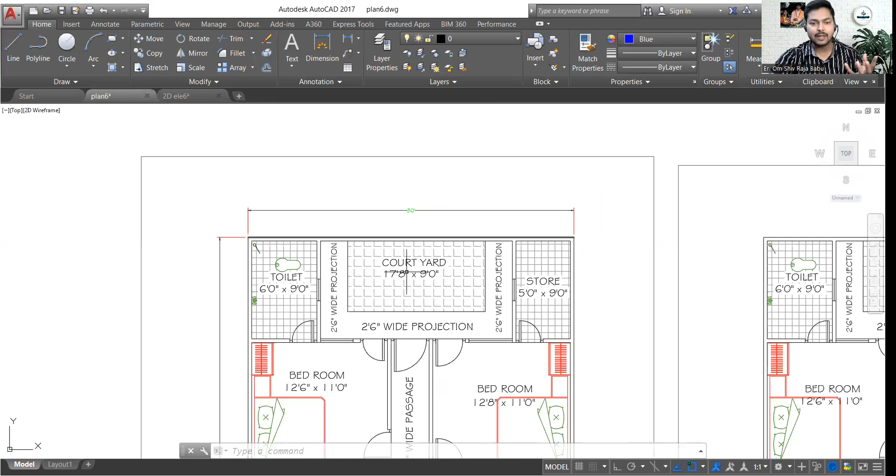Then you can also see we have this porch area for the ground floor, and on the top floor we have the balcony. So we can just provide a few ducts over here, and this is also going to be a duct over here. But obviously this is not mentioned over here, so I can just draw two lines so that it can be very easy for you to understand where the duct is provided.

So this is the first line, and then this will be our second line. Okay, so I'm just going to do it for you. So you can see this is the duct over here. We have one duct over here, another over here, and at the back we have a courtyard, which is also acting as an open space over here.

Okay, now the next thing is we need to consider that each and every element should be present in the house. Like, we should have a drawing room, living room, dining room, kitchen. Then we should have a common toilet. We should also have at least one master bedroom for such a big plot, and we should also count the number of rooms over here.

So on the ground floor, what do we have, two bedrooms, right? So on the ground floor, it is a 2 BHK arrangement. On the top floor we have a 3 BHK arrangement. I will also show you how to increase this. Okay, now according to the requirement, it is discussed so far.

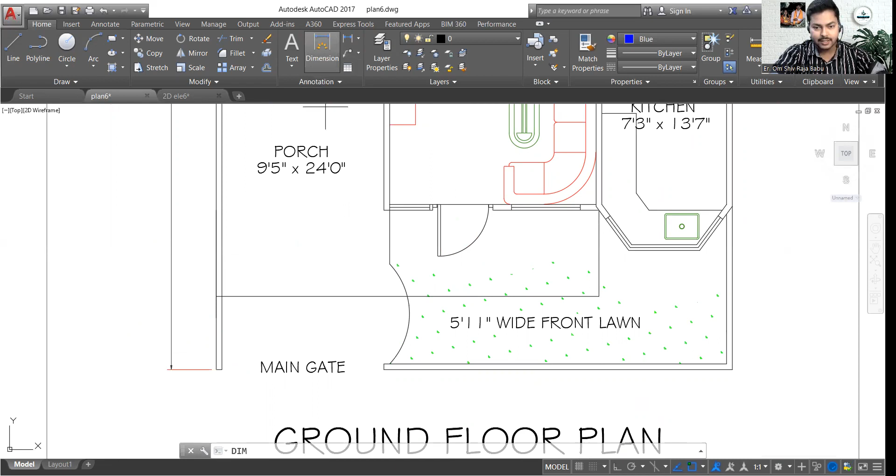So let's see, this is our main gate. Okay, this is a wide main gate right over here, and if I check the dimensions, let's see how much the dimension is provided. So it is almost 9 feet 5 inches, a wide gate, right? So you can also reduce it to 7 feet or 8 feet. That's up to you, how much is your requirement.

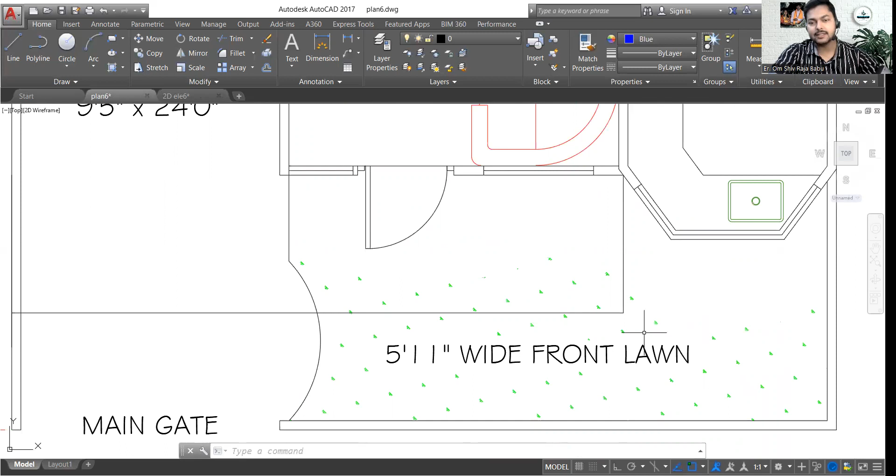Then you can see we have a 5 feet 11 inches wide front lawn. So this is a big lawn, and we can simply use it for our evening tea. Now you can see this is our porch area, and in this porch area we have a 9 feet 5 inches by 24 feet space.

Now this is quite a big porch area, I must say that. This porch area is also including a few things like this passage and all. First of all, we can park our vehicles over here. Then this is our main door to the building, and it is the door which is leading us to the drawing room.

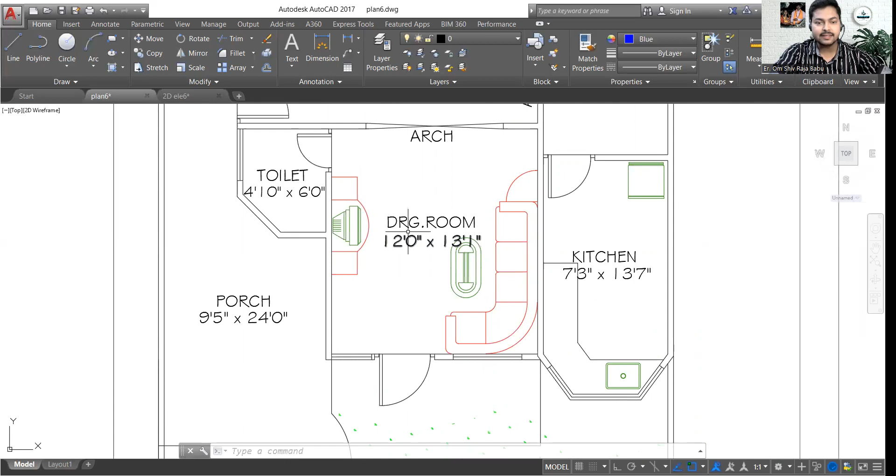Then we have the sofa arrangements and the center table, TV unit and everything over here. So we can simply use this, and then this is just a side table. This symbol is not very much clear because we do not have any kind of flower over here, so I am just making it clear to you that it is a side table.

Then this is an arch opening, so that means we have a passage over here and we are not going to provide any kind of doors at this space. It is an arch opening over here. Then the second arch opening you can see on the right, which is opening to a dining space.

This dining space is 7 feet 3 inches by 10 feet 8 inches, which is quite a spacious arrangement. And this is just attached to the kitchen, that is of 7 feet 3 inches by 13 feet 7 inches.

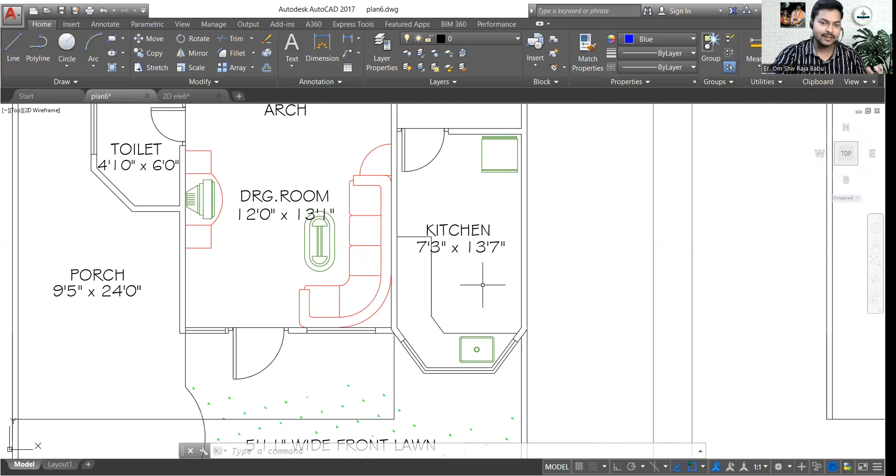I am just studying the plan right now, and I will give my input of all the plan details in just a minute after the completion of this study. Then you can see we have a lobby, which is quite a good space over here.

It is of 13 feet 2 inches by 16 feet. So that is very good.

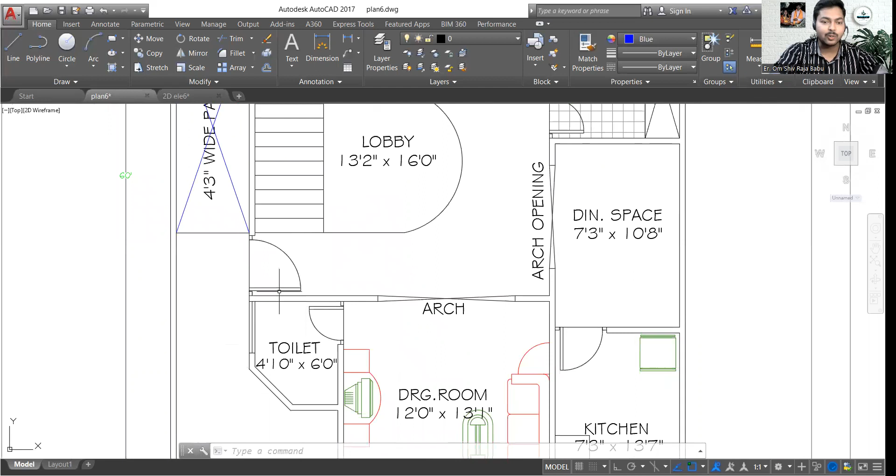Then we have this staircase, which is taking us to the next floor, and we can also notice a door over here. This door is acting as a second entrance to the building, and those who are residents of the building can directly enter through this.

Suppose some guests are already sitting over here, and a few of the family members do not want to interfere with that. So we need to provide a second entrance to the building, and this is right over here. This can also directly take us to the next floor. So that is another arrangement.

Now you can also notice a common toilet over here, which is also attached with a duct, so the ventilation of this common toilet will be through this duct. I will also talk about the ventilation in detail, so don't worry about that.

Now you can see we have a 4 feet 3 inches wide passage, and it is directly taking us to the courtyard. This is also opening a door for this bedroom, which is a master bedroom, and you can see the dimension of the master bedroom is 12 feet 6 inches by 11 feet, and the toilet is of 6 feet by 9 feet, which is a spacious toilet.

So when you have a 30 feet by 60 feet plot, then you have a lot of space to accommodate everything. Then you can see on the right we again have a bedroom, and this bedroom is opening to a storeroom. Now everything is good over here, and here is something unique in this plan.

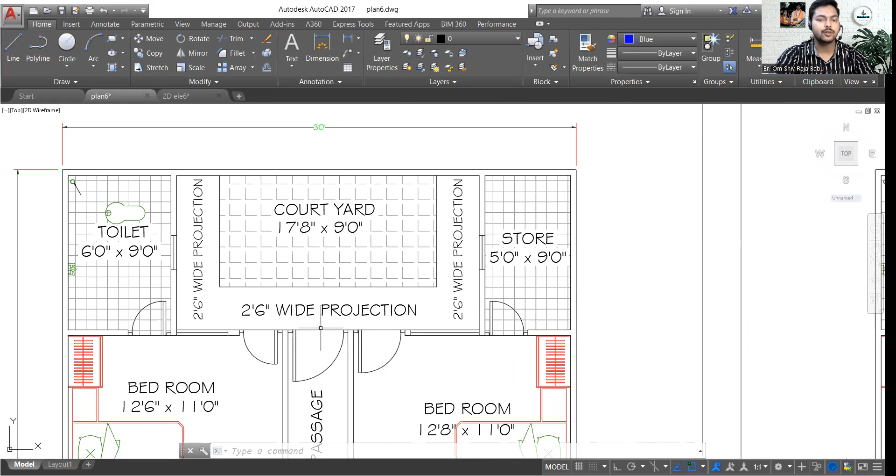You can see a projection over here. This projection is going to save our windows or doors from the rainwater. So even if there is a heavy rainfall, this projection is going to save our internal rooms, and you can simply keep your doors and windows open even if there is a heavy rainfall going on.

You can see the projection is 2 feet 6 inches from all directions, and still the courtyard is having the space of 17 feet 8 inches by 9 feet. Again a very spacious courtyard, but the courtyard must be spacious anyway.

Okay, so this is the arrangement over here, and I have a lot of inputs to give on this particular ground floor, so stick till the end of this video.

Okay, then through this staircase we are going to reach the next floor, and you can see the arrangement is almost the same for the lobby. Everything is of the same dimension. We have the common toilet over here. Now this dining space is being used as a room over here, and this room is also entering another room, which is our study room right over here. Then we have used this parking area, or you can say the lawn area, as the balcony till this space. Okay, and we have a door over here.

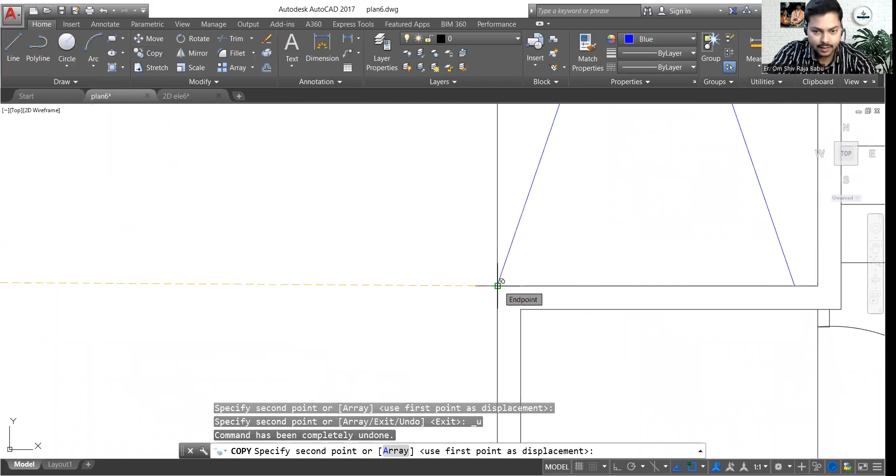Then this is a duct space, so you can simply select the two lines. So I'm just selecting it, and I'm copying it from here to here. Okay, Control Z. I have selected it wrongly. I should have selected it like this, and I should have copied it from here to here. Guys, I have not prepared this plan, so I must make it clear to you.

And the guys who has prepared this plan has done a tremendous job. That's of no question. But I'm just going to make some corrections also over here.

Now you can see this is the sitting area. Then we have a toilet which is opening right from here. Then we have this another door taking us directly to the balcony. The staircase is getting the lighting and everything from this duct area. Okay, then this bedroom is also getting the ventilation from here. This bedroom is getting the ventilation, one from this duct, second from this particular courtyard area. And you can see everything is same over here, so I'm not going to waste a lot of your time and a time of mine.

So now we have studied everything for this plan. What do we have to do again? Now I have to put my input over here, right? So I'm just going to suggest some changes to this plan because this is my work. I'm just doing the plan checking over here.

So let's start with the ground floor. On the ground floor, you can see we have this toilet area over here. I will just make a copy of it. And guys, if you are new to AutoCAD, then you can also just join our course on AutoCAD.

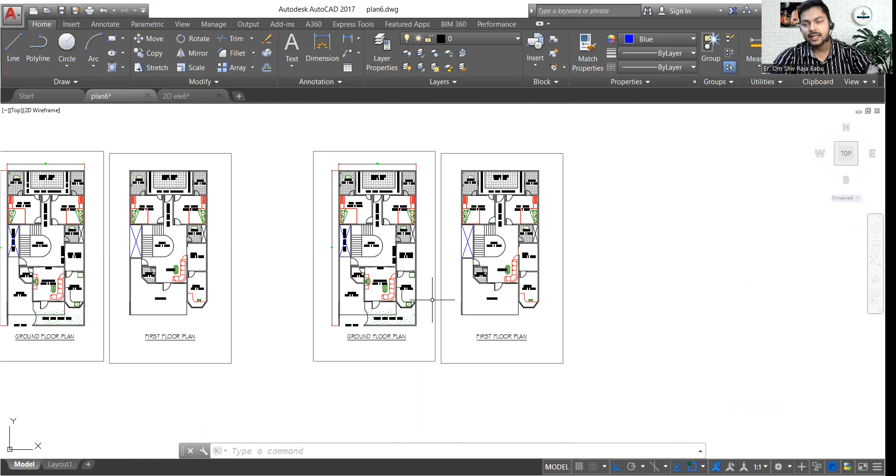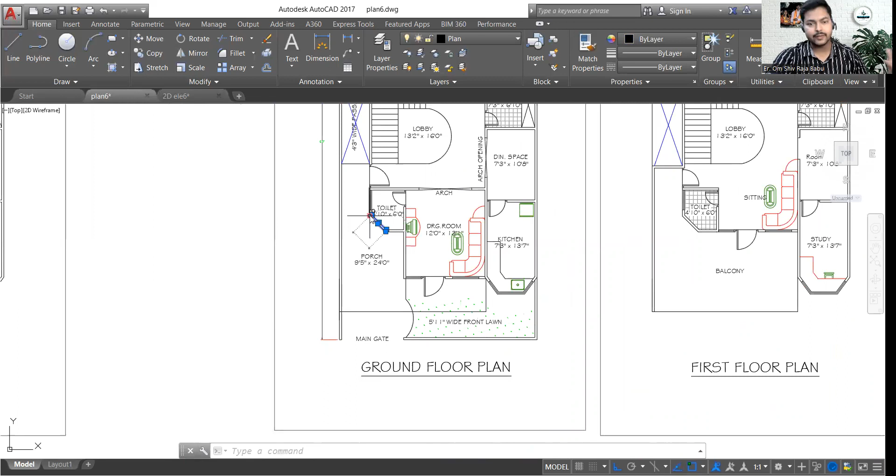So now you can see we have this toilet area, right? So this wall, I do not like this kind of arrangement because it is already hidden on the ground floor, as well as it is far from the balcony area. So it will not be visible even on the first floor. So we can simply just delete these two walls and we can extend these two. Okay, so we can simply extend it like this.

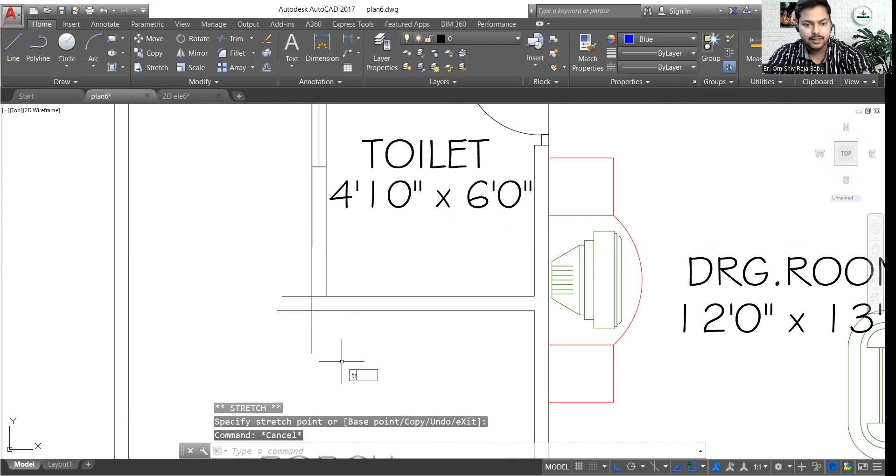And we can make it a simple, just extend it square shaped, or you can say the rectangular toilet over here. Okay, so TR double enter, and I'm just going to trim out these lines. Okay, so now you can see this is a better arrangement for the toilet.

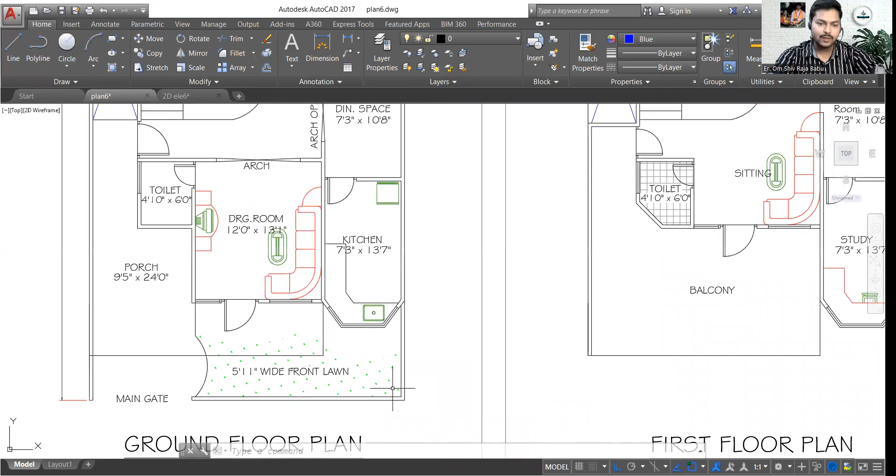Now we can just make it more spacious right over here because it is already 4 feet 10 inches by 6 feet, and we should not plant any kind of cutout over here because this design is not visible. That's why I'm doing this. Okay, for the kitchen, yeah, it is quite visible from the wide lawn, so yeah, we can go with this. But for the toilet, let's keep it rectangular.

Then this door is good over here. Okay, everything is good over here. That's not a question mark. Okay, then this 2 feet 6 inches wide projection can be used as a room also. So we can simply stretch this wall to bring it over here.

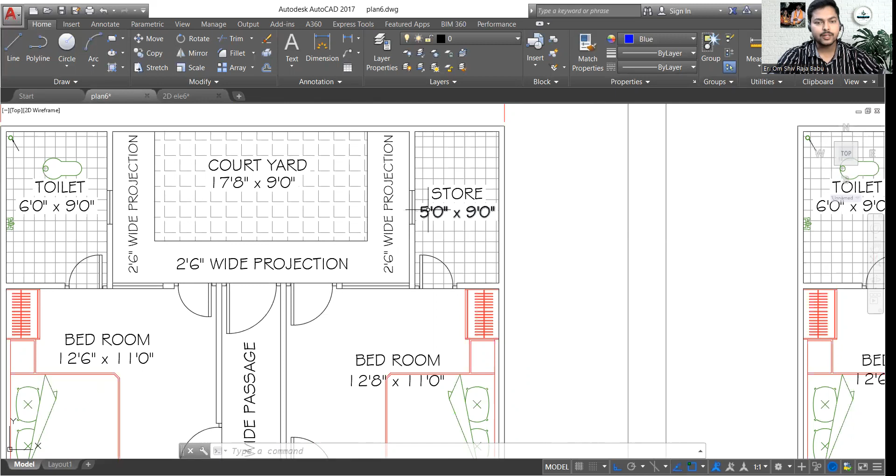Okay, so this window will be shorter in size, but this can be a bigger room right over here. But for the storeroom, we can simply use it. However, the storeroom should have been attached somewhere nearby the kitchen, not over here. So we can also just make the storeroom right over here, and we can use this space as another room, or even the attached toilet. That can be done, so that we can have two master bedrooms right over here.

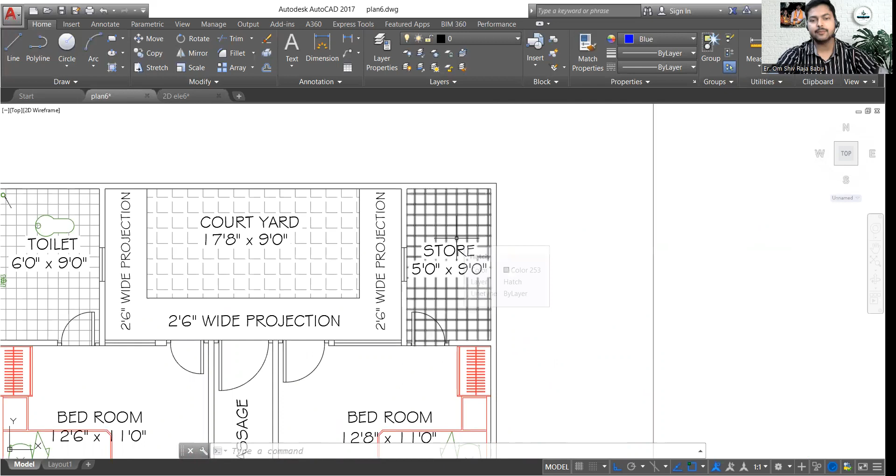Now you can see on the first floor I have a lot of suggestions. I can simply eradicate this storeroom if I'm not in need of two master bedrooms, then I can just make it another room. What I can do, I have a few suggestions, like I can simply select the lines like this.

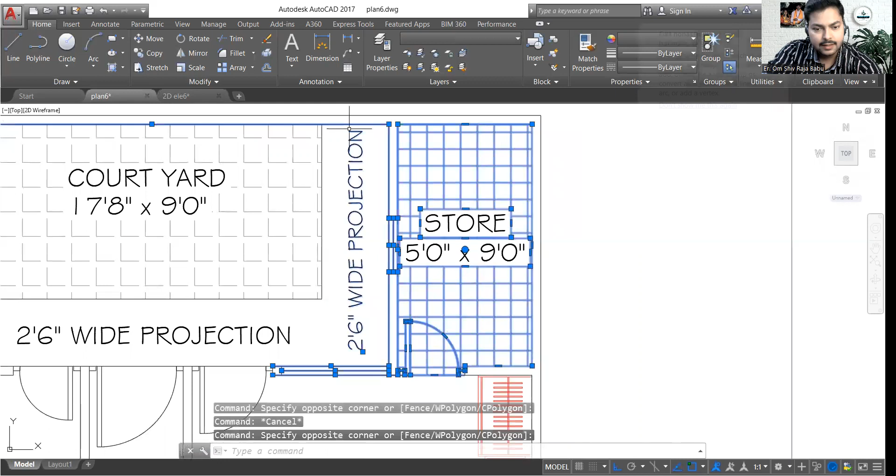Let's select the lines first. I'm selecting the lines like this, then I can use the stretch command, and bring this from here to here. Now I can use this room as a full-fledged room, so that can be done over here. Control Z.

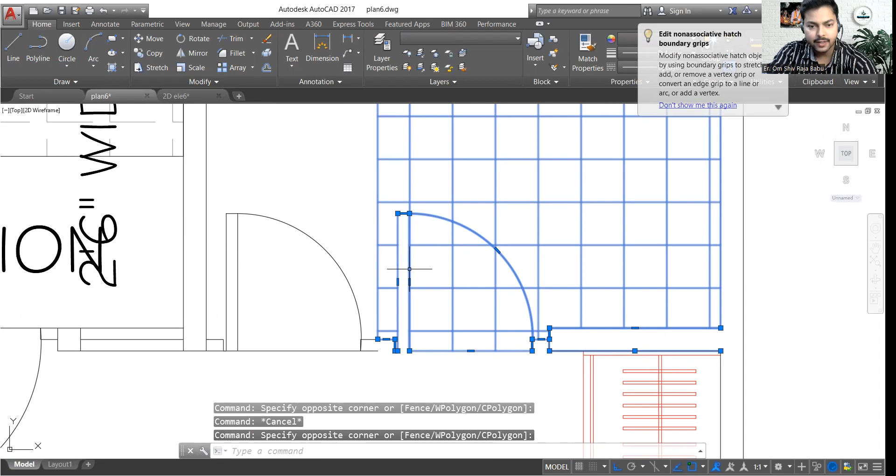Okay, these two lines need to be extended, or I can simply select these, stretch, and bring it here. So we can use this arrangement also. We can just delete the hatch area, and use it as a room, another bedroom over here.

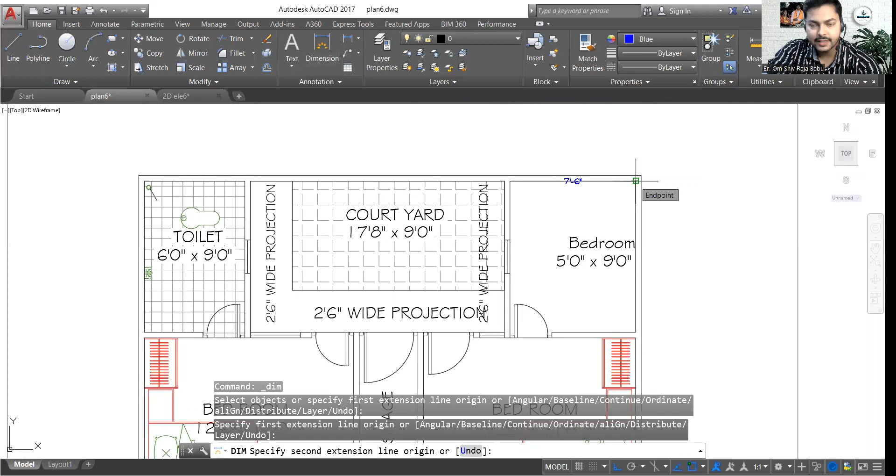Also we can change it, and now we have increased the dimension. Obviously the dimension should be 7 feet 6 inches, but anyway I will simply measure it so you can also be clarified about that. So yeah, it is coming 7 feet 6 inches, right? So I can just make it 7 feet 6 inches over here.

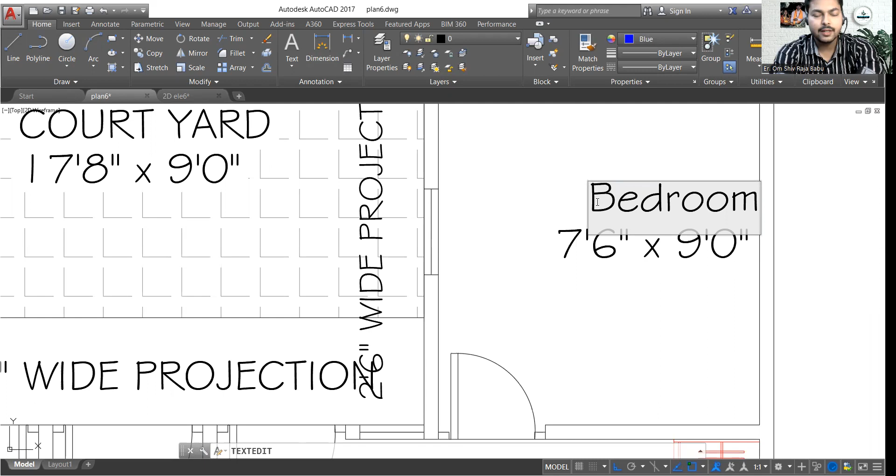So this can be used as a proper kids room, right? 7 feet 6 inches, and we can use this as kids room or small bedroom or kids room, whatever you want to name it. I would prefer it to be a kids room right over here.

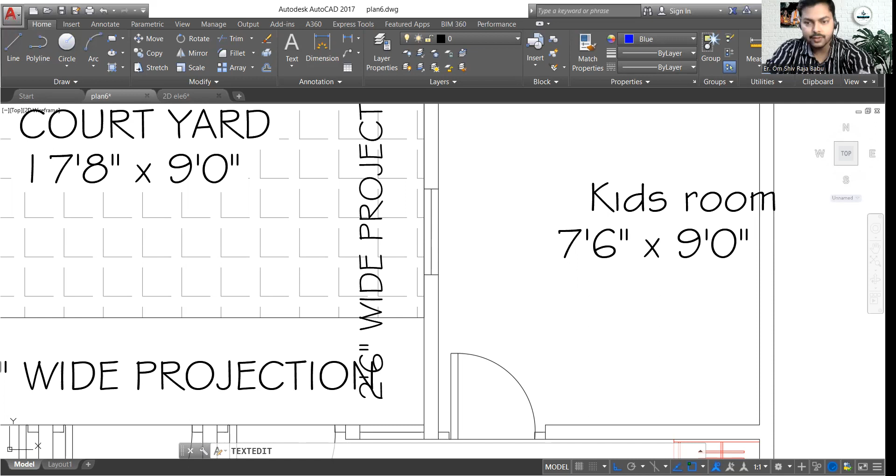Now about the door, we can either keep this door like this, or provide another door right from here. So even if it is a kids room, we can just go with a 2 feet 6 inches door over here, so that will not be an issue. Either you can shift the door over here, or use this door, that is up to you. But I would prefer to just use this door over here.

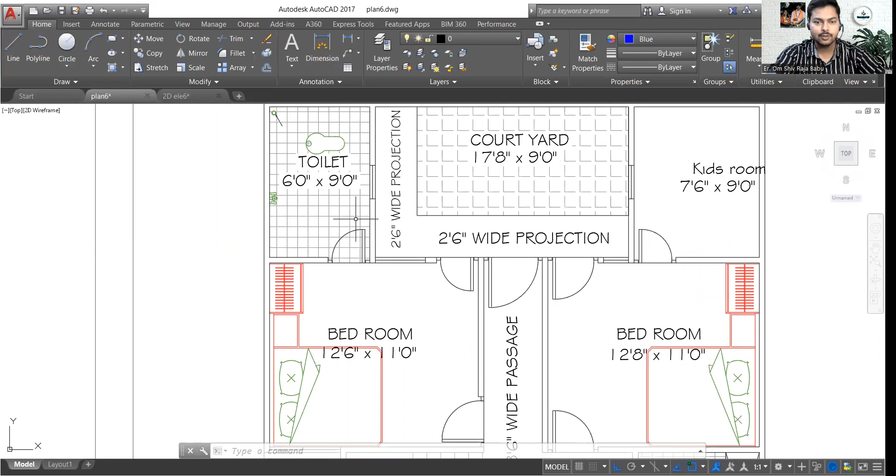Let's see, that will take time for me to make the corrections, and now I can simply remove this projection area. Now you can see this room is fine with me, this toilet door is again fine with me. However, you can do one more thing: you can simply provide the door of the toilet over here, and do not make this an attached bathroom, so that all the residents of these three rooms can also use this if they want to. So that is another suggestion.

Next, for this toilet, I told you I have to increase the area, right? So I'm just going to select these two lines, then I will simply extend all these lines like this. This is another way of doing it; otherwise you can also use the extend command, that is up to you if you want to use that, but I prefer this one. So you can just increase the size of the toilet like this.

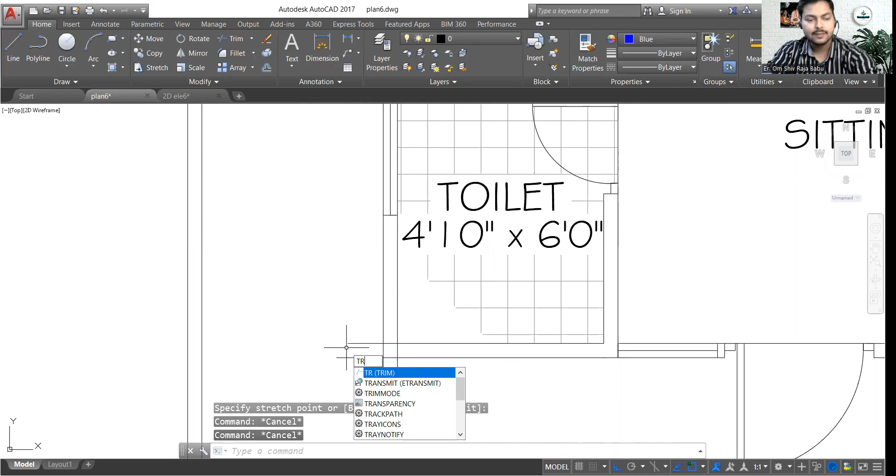Now, about the door of the toilet, you should not just keep this door like here, you can also rotate and provide it over here. That is another thing that must be done, because the toilet door should not be facing this area. So I'm just going to select this door, now I'm going to rotate it. And this is my suggestion: either you can go with this kind of arrangement, move from here to here.

And better, I should place it. Move from here to here, and then move again by 5 inches. Okay.

Then we can simply extend these lines. So how to do that? First of all, use the extend command like this, EX enter. Select this object, enter, then extend it like this. I told you there are many ways of doing things. So we can simply do that. Then we can trim out the extra portions like this.

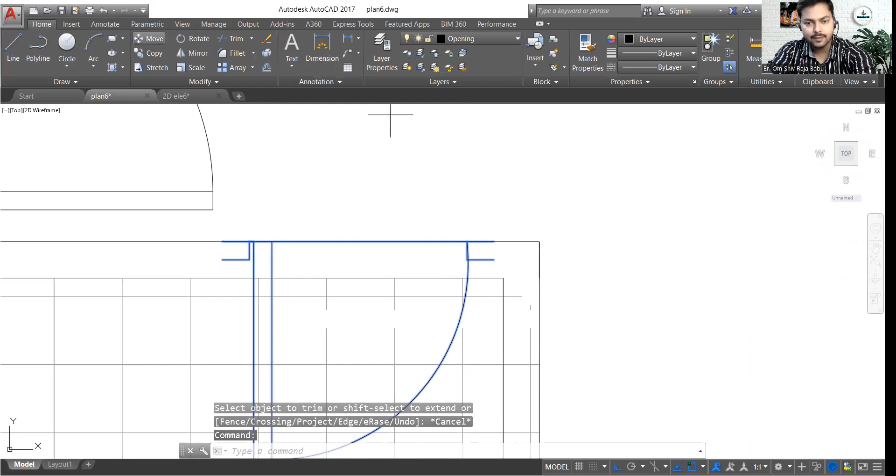And we can bring it right over here. Move. And then move again like this. Okay, so we can go with this kind of arrangement right over here.

We can draw lines also from here to here and here to here, and delete this line. Or simply stretch it back till here. Okay, so you can just go with this kind of toilet arrangement also.

Then you can also provide this door right over here and close this wall, so that you can have two different rooms, which are getting access right from two different directions. Okay, so that can also be done.

Then we can also shift the door in this direction and shift the sofa right over here. Okay, so we can also do a little bit of shifting on this one. That will make it better. Just move it.

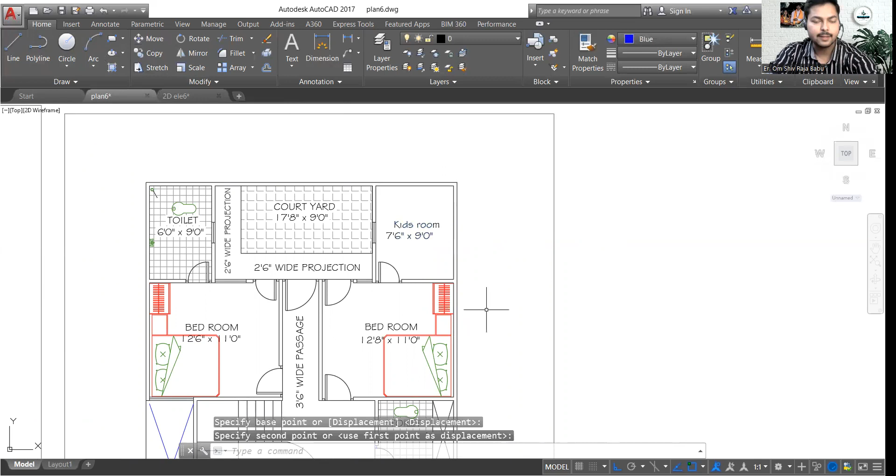So guys, this is my suggestion, that you can also just keep this kids room door right through the balcony and not through here, so that it can be a separate room. I will also show you how to do it, because it's not going to take a lot of time, and the suggestions should be quite clear, right?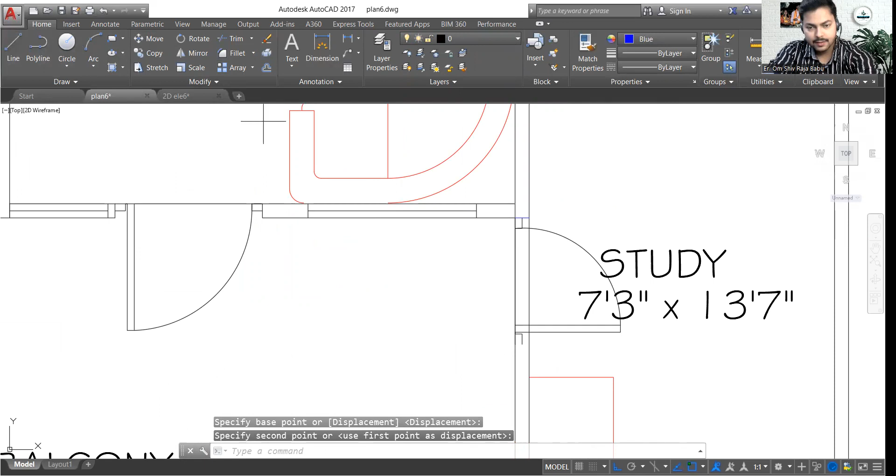So I'm going to just do it. Let's draw this line. Now bring this over here. And draw another line like this. Then we can simply trim out this line.

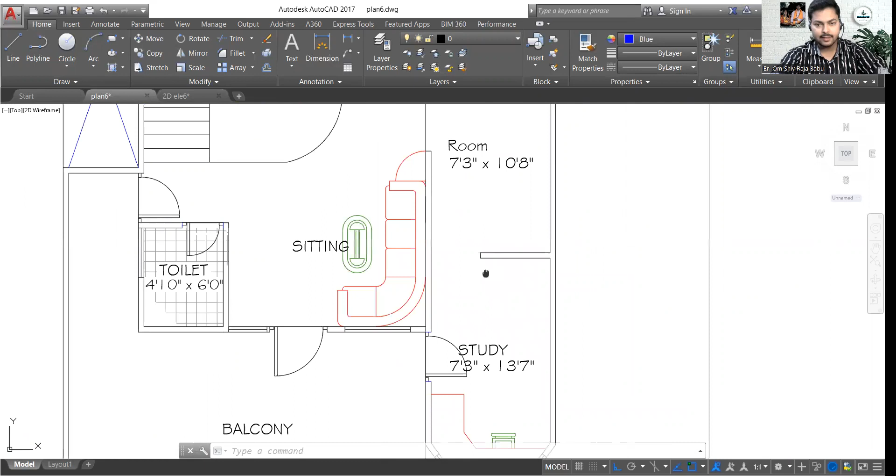Got it? So you can just go with this kind of arrangement also. And then you can close this one with a stretch command, and you can stretch it till here.

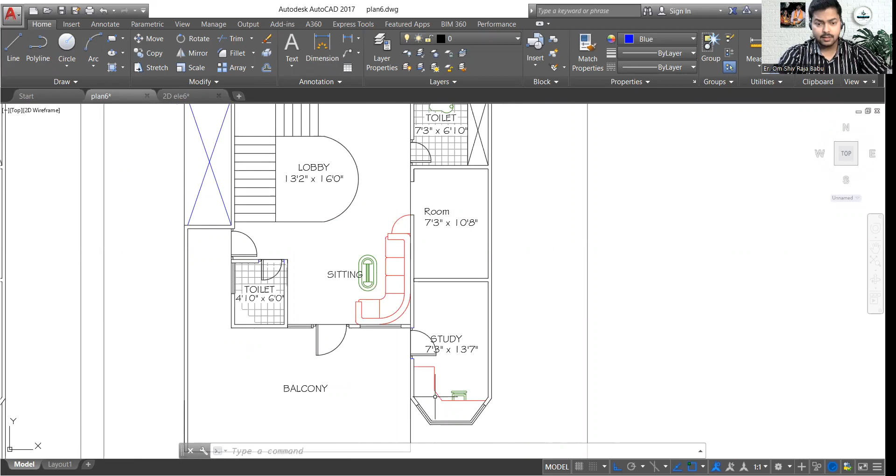Then this can act as two different rooms, and none of the rooms will be interconnected over here. Okay, there is no harm in keeping this arrangement. So we can simply avoid it. Otherwise, if you just don't cast any kind of slab, for the study room, the slab casting is not very much needed also. Okay, so you can simply place the door over here also.

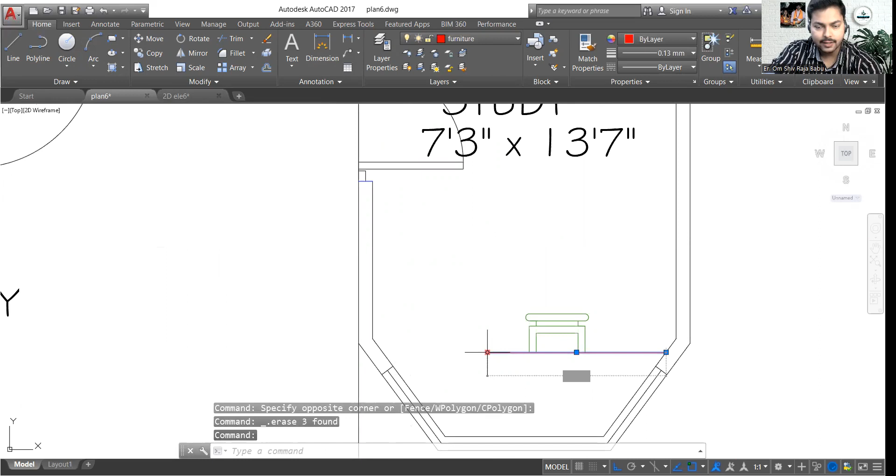That is up to you. Like suppose I am deleting all this. If you are willing to make another kitchen on the top floor, then the previous arrangement was right. But if not, then you can just go with this kind of arrangement.

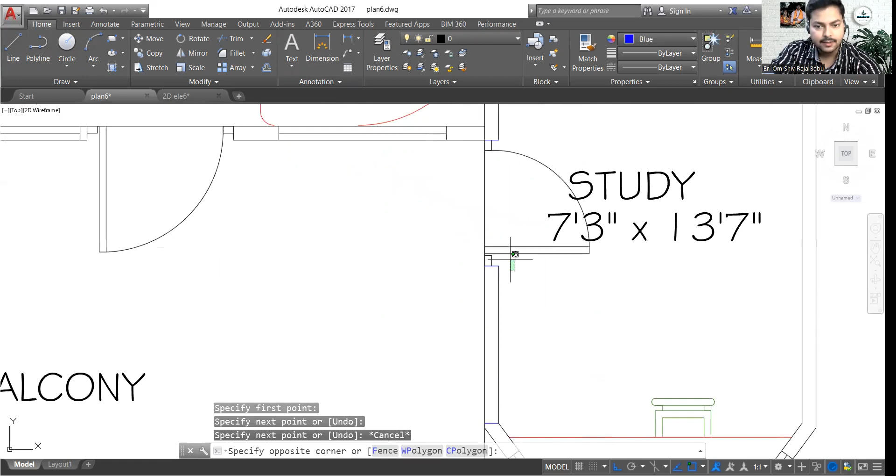Now I can simply just come over here and draw a line like this. Then I can move this one. So see, it is a very quick way to do it. So do not worry that it is taking time or something, because it will be very quick when you are doing it.

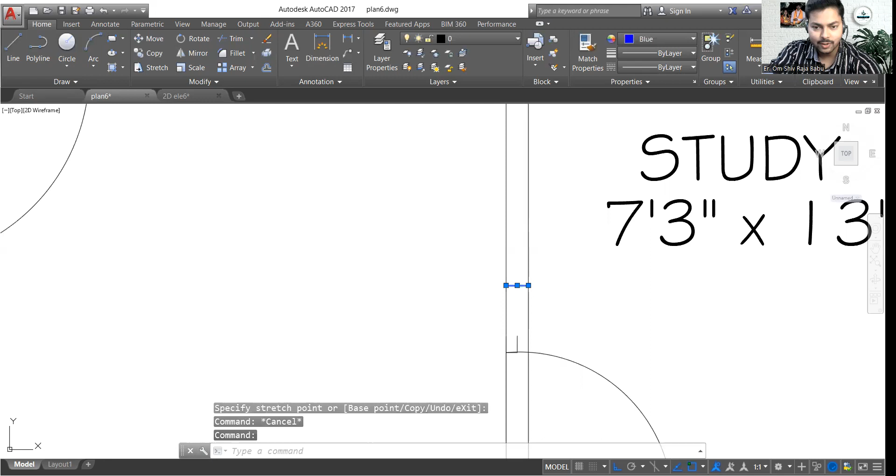Simply grab the point, edit it, and move this line. I can also delete and draw another line. That will be quicker, but yeah, I'm just willing to do it like this. Then we can simply trim out the extra portions.

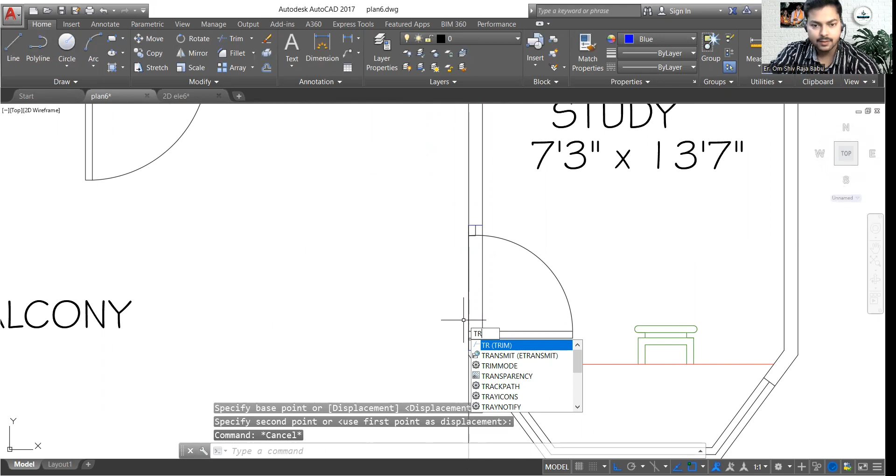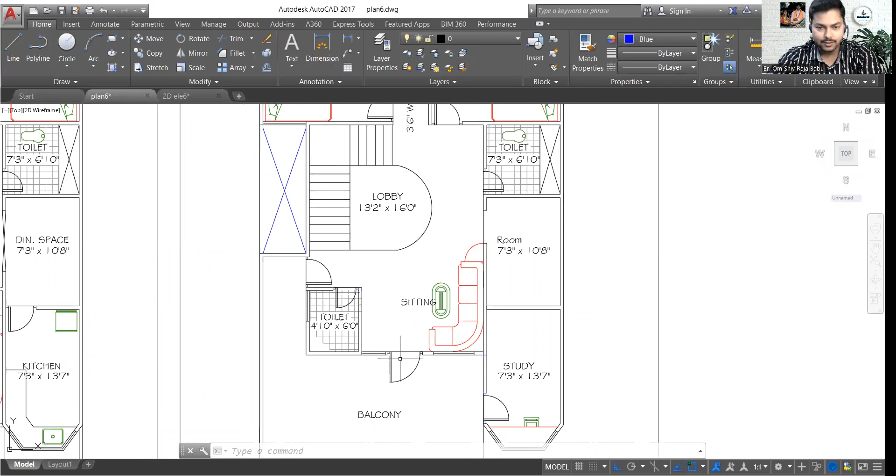So you can see this can be another arrangement right over here. And we can simply use this room as another room, and we can provide a window one over here, another for this room over here. Okay, so windows can also be simply placed like that. And we can rearrange the sofa over here, and the doors can be rearranged. Okay, we can simply rotate the sofa and place it over here. That will be quite easy, and you can also just imagine that.

Now guys, that is all for today.